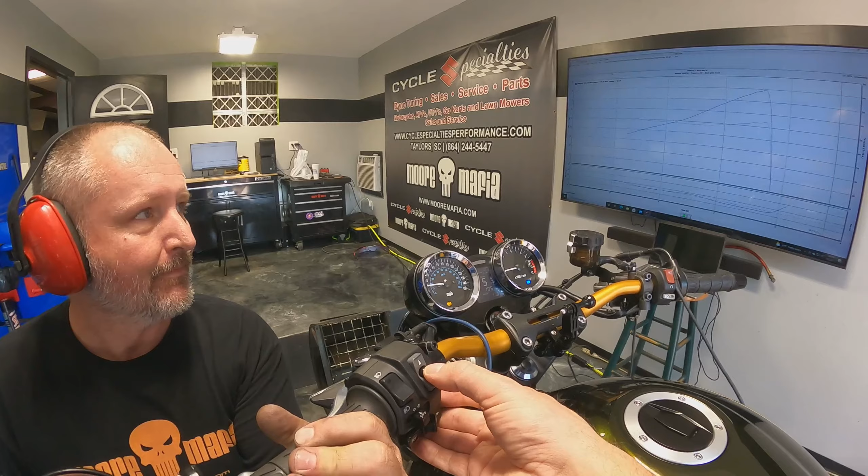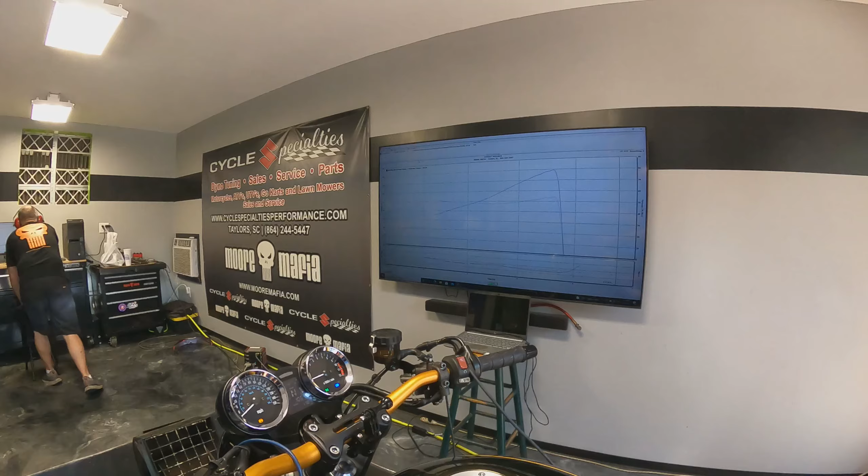Get it stopped. Alright, traction control is off. But actually spun the tire up? It starts to spin the tire again. The drum needs knurls. Yeah. You gotta strap it down really tight. Alright.

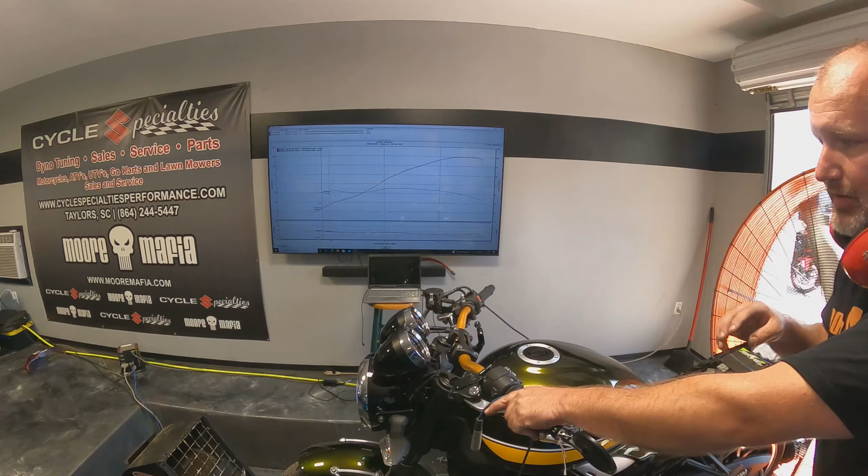Right. That's it coming to the rev limiter. It has a fuel cut, a soft cut is what they call it. And so it will start pulling fuel when it thinks it's about to hit the rev limiter. Okay. So that's about 10-1 on the tach. Gotcha. The dyno and the tach never read exactly the same. Is that something you get rid of, or just what it does? I'll have to look at the file. I don't know if I can or not.

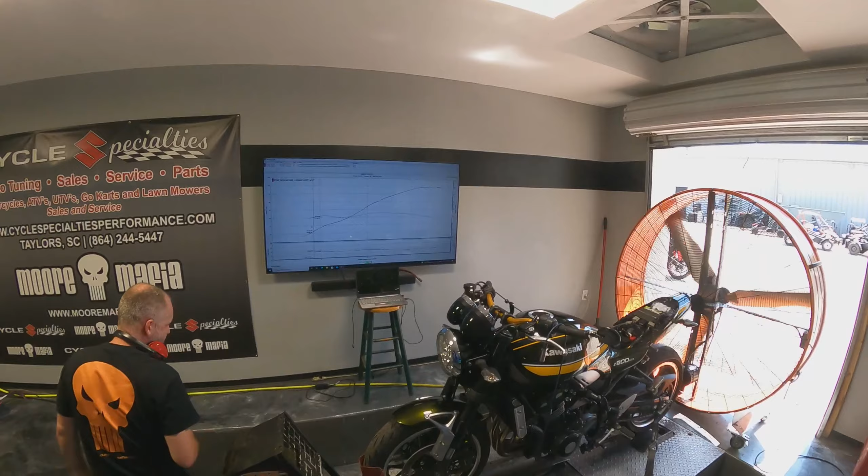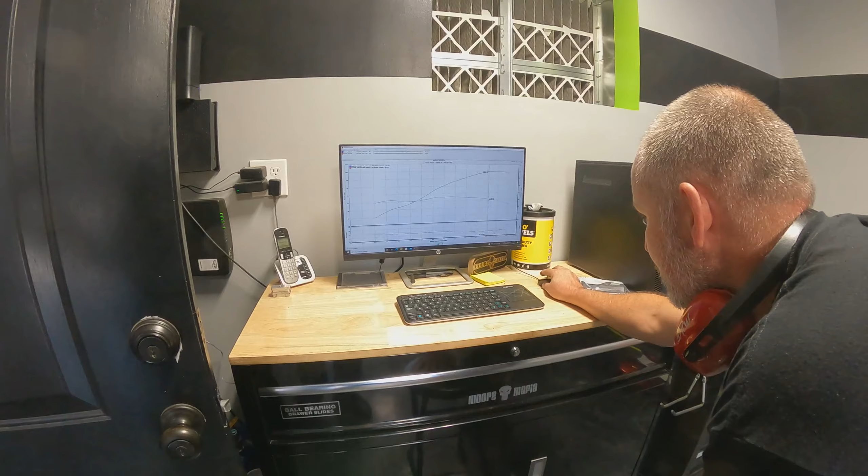But yeah, it'll start randomly pulling fuel from different cylinders. It knows it's getting close to the limiter, and it says, "Hey, I'm gonna try to stop this from happening." Sure. Some bikes give you the option, some bikes do not. So it is a little rich. Yeah, down here it's really good. It doesn't look bad at all there. But up here, 12.6s, about 7,000 up. It's a little rich. It's definitely rideable. Definitely not a problem. This all back here looks really good.

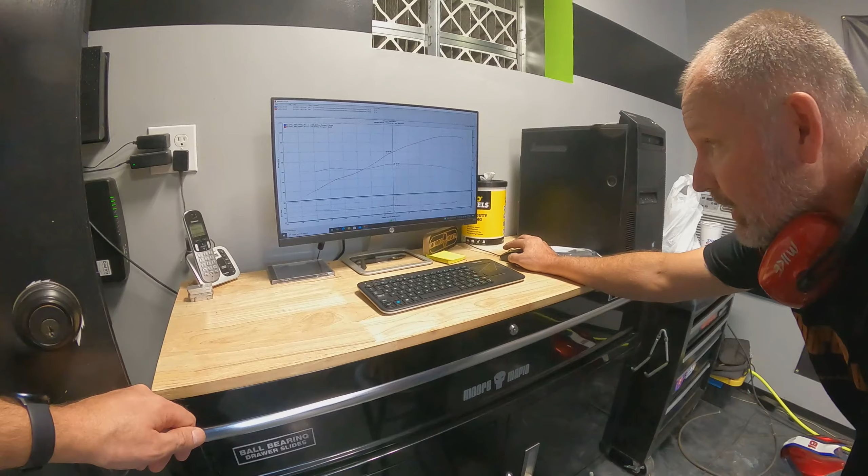So we lean that out a little bit, and it will pick up. A little lean is mean, they say? It definitely will pick up. Yeah. And if we get just a little bit more in that area as well. All right, that's cool. Let me go in and grab the harness and stuff that I need.

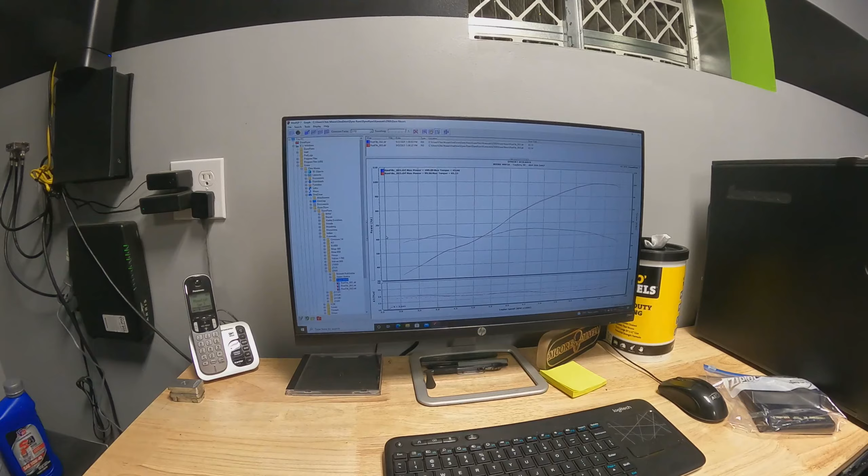All right, so we're sitting about 100 horsepower. And what was the torque? We'll get it when you're done. There you go. So peak torque 65. 65 foot-pounds. It looks like we're running a good bit rich in here.

Not lean. That's also surprising, when you free all that up, you figure it's going to be lean up there, and it's not. No, it's rich. All right, cool. Well, he may already have some fuel up there, and he may have just slightly overshot it. That looks like a lot, but realistically it's probably 4%, 5% fuel. Nothing drastic. Not like it's 20% over fuel. Right.

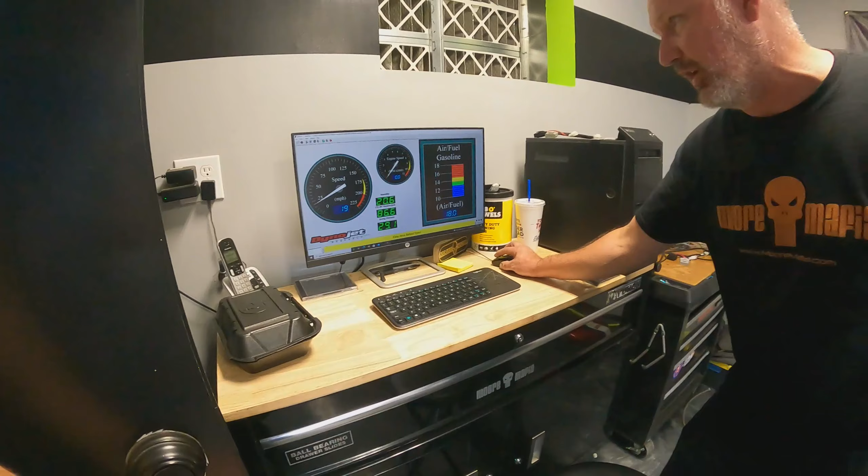By doing that, that tells me that whenever it picks up more torque, that's definitely better. And another thing, if we look at the two runs back to back, they're very consistent. At different heat in the motor, different temperatures, we want to be able to produce the same result. So that would be our second pull, the way it was initially with the original flash, and then that's after I made the changes to it.

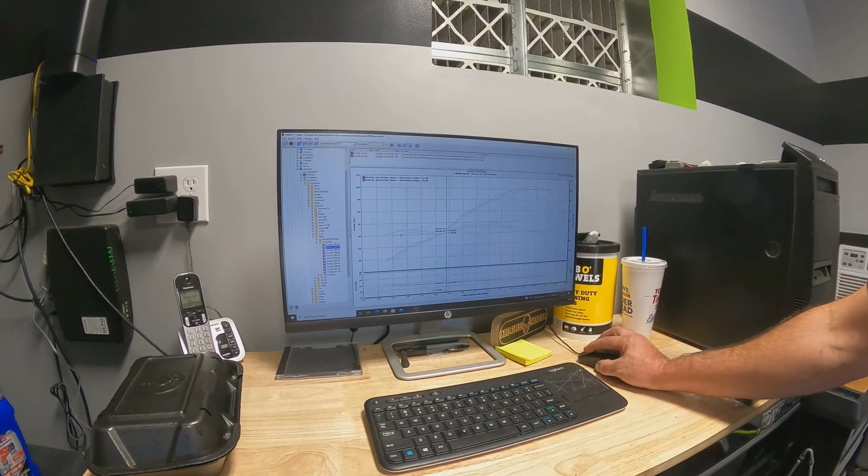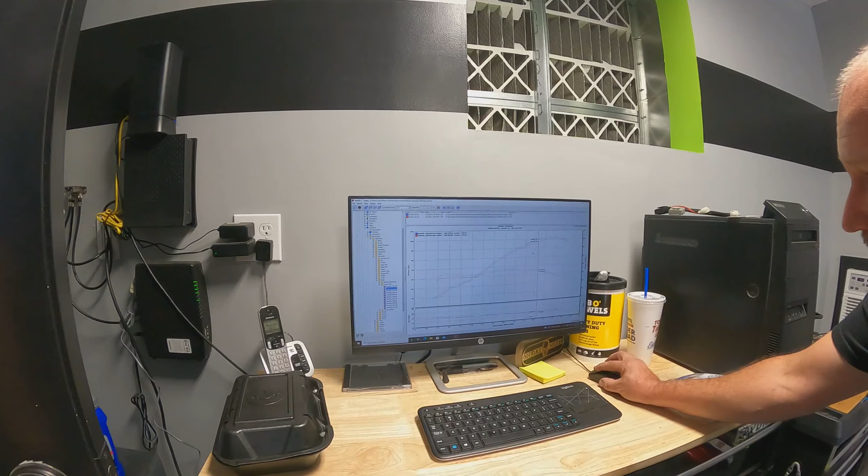So again, not gigantic changes, but that was already unrestricted, already had timing. So did you see how much smoother it is? Yeah. I know it doesn't seem like it, but 2 horsepower pretty much across the board just by dialing it in, and adding that little bit of fuel down here actually helped it as well. So yeah, I'd be interested.

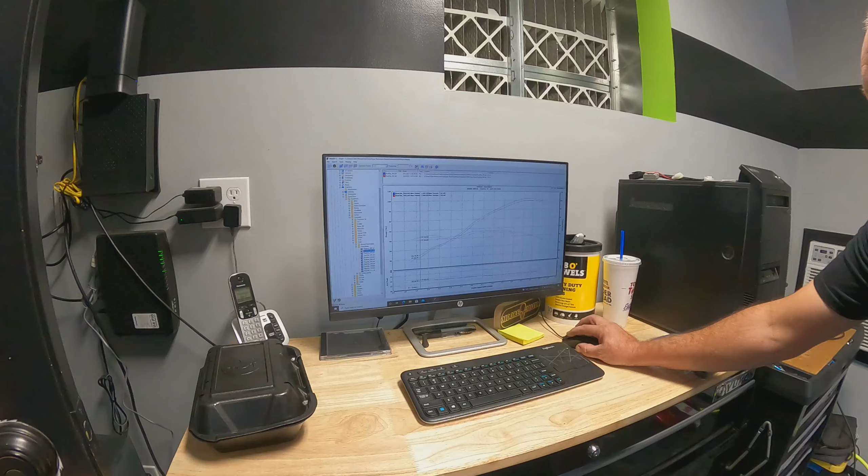This has got to be something to do with the way the cam starts to come in phase, it's got to be something related to that. But I think to get the bigger gains out of this, you've got to do the headers. You're going to have to do more modifications. But I'm not worried about it. That's not what you're trying to do. No. I've got other bikes. If I want to go faster, I've got other bikes.

And then you saw all your cruising stuff. See how much more steady that air fuel is. Didn't have that big lean spike right at about 4,000. So that's going to make a lot of difference. Yeah. So I think the bike's going to be a lot more pleasurable to ride. It'll also be a lot cooler on your legs when you're rolling down the highway, because it wasn't lean where it's hurting the power delivery, but it would make it run slightly warmer, which is already an issue with this bike. They tend to run hot. It's going to make a big difference. All right, cool.

You see, that's where most of the work goes in that map, into that cruising area. Right. That 3,000 to 7,000 area of the map. Very cool. All right. Well, there you have it. It's almost like they knew everybody was going to take off that exhaust.

Yeah, I think where I was seeing the bigger numbers from like Dale Walker and Ivan, they were using different headers. Absolutely. This has a pretty large exit and it's all one size. So on this, I would say a stepped header design, where it's slightly smaller and then about 4 inches out it enlarges. That's going to help evacuate the exhaust faster. That's where you're going to see more, probably 107, 108, 110 numbers.

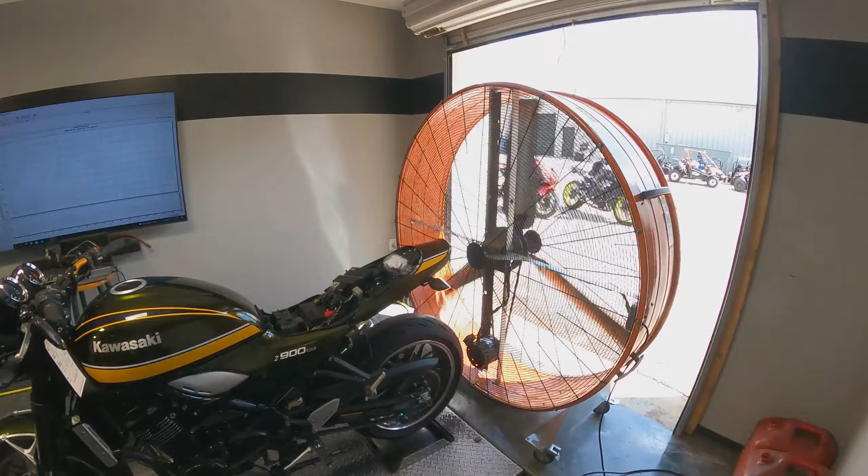I had Tony up at GMD CompuTrack set this suspension up last week. A little bit thicker fork oil, got it dialed in, and then had to replace the shock. Cool. All right, awesome. Well, there you have it. We'll go through the gains. I'll get the files themselves so I can do screen caps of the beginning run and the end run. And then we'll cut this all up and throw it into a video.